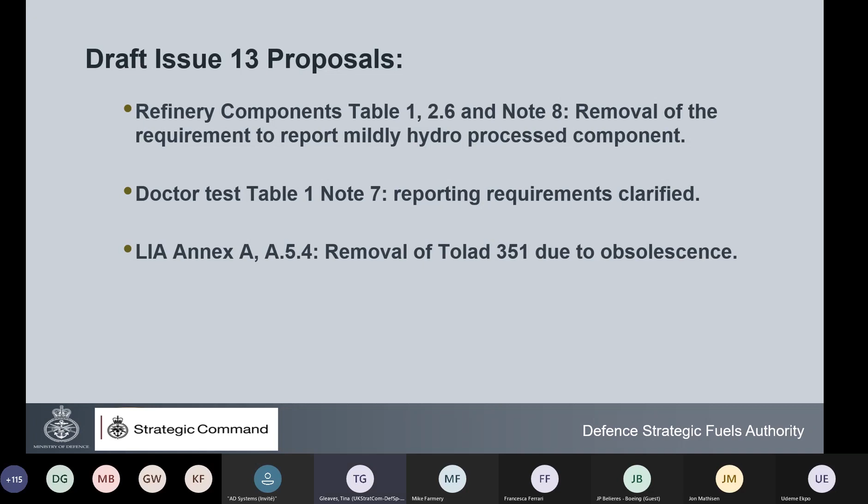Lubricity improving additive, Annex A, A5.4. So Tolad, so we've removed Tolad 351 due to obsolescence. This item is no longer supported by the manufacturer. Can you go to the next slide, please, Francesca?

The co-processing data source, Annex B, B4.3.4 has been reworded essentially to align with ASTM. The estimated distillation data in Annex E, Note 2, calculation of IP 123, has been reworded to provide a more detailed direction in what's required. In addition to these, there's just been some minor formatting and editorial amendments. Next slide, please, Francesca. So that completes issue 13 draft.

So if we're looking ahead to draft issue 14, work is intended to commence on draft issue 14 start of October 2021. So if you have any comments or suggestions, please forward them to myself and Katie. We're happy to take them forward to EXCO. Next slide, please, Francesca.

It's very early days for draft issue 14, but it doesn't do any harm to think about any changes we would like to see for the next issue. So what we have on the books that have been carried forward is conductivity. Can this safely be reduced down to 25 pS/m? There is currently some work going on with some of the OEMs looking at conductivity. So this topic will be addressed following the outcome of the external work.

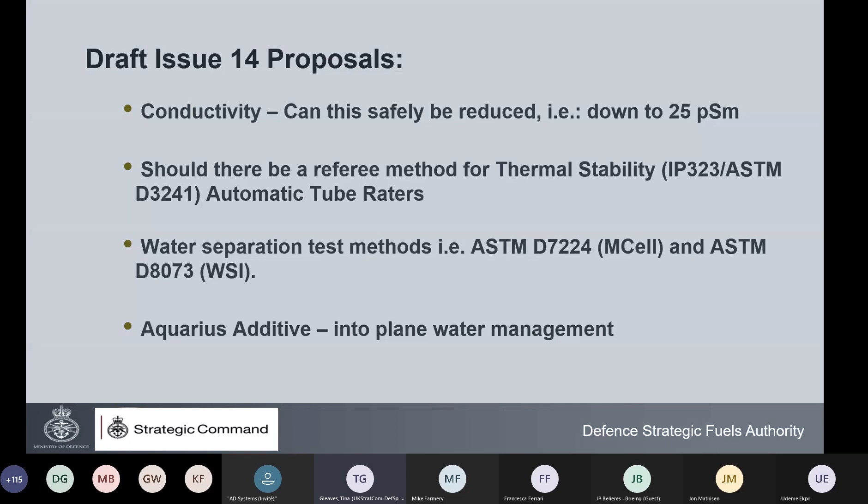It works by encapsulating water present in the fuel by forming a molecular cage or a micelle around the water molecules and is removed from the aircraft fuel tank by the combustion process. Next slide, please, Francesca. That concludes the draft issue 14, future issue.

The next AFC conference, hopefully, fingers crossed, we can have a face-to-face meeting next spring. The vaccination programs are rolling out and seem to be having a very positive effect on COVID statistics. So fingers crossed, we can do this. If that's the case, it'll be 15th to the 16th of March 2022. The venue will be London, to be confirmed. And details and registration will be published by the Energy Institute and DSTAN. Next slide, please, Francesca.

Right, all the images I've used in this presentation are from the Defence Image website, and they're from public sector information licensed under the Open Government License version 3.0. And this image shows the air-to-air refueling with Typhoon. And I have been lucky enough to have witnessed this in person quite a few years ago now, but certainly a memorable sight and an experience to remember. Next slide, please, Francesca.

Well, just before I take any questions, this image shows the Battle of Britain Memorial Flight, and this photo shows a Lancaster accompanied by Hurricanes and Spitfires. The Battle of Britain Memorial Flight mission is to maintain the priceless artifacts of our national heritage in an airworthy condition in order to commemorate those who have fallen in service to this country, to promote the modern day Air Force and to inspire future generations.

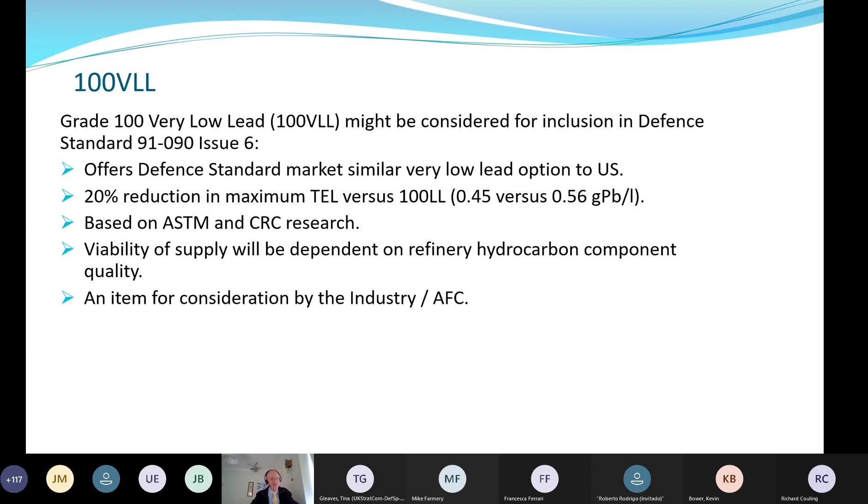If we move to the final slide, please. That completes the update for Defence Standard 91090, piston engine fuel. I hope you've enjoyed the presentation. Happy to take any questions.

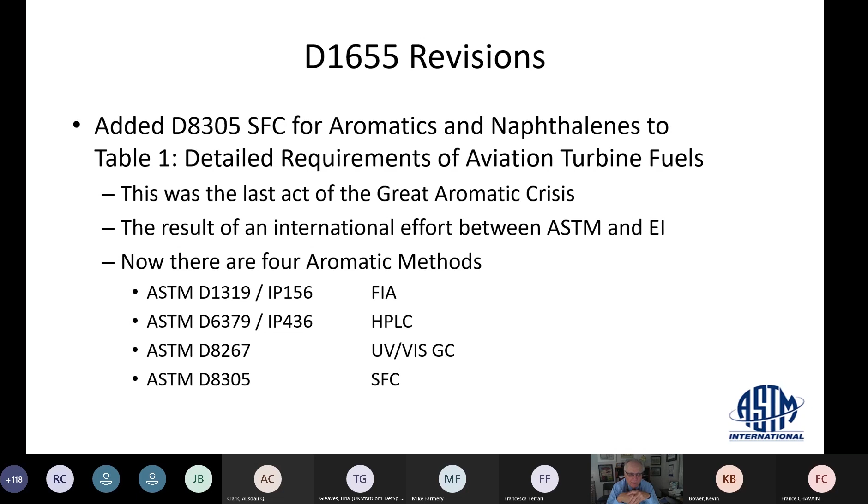Now there are 4 aromatics methods in the 1655: ASTM D1319, IP 156 FIA methods, which remain the referee in 1655; ASTM D6379, IP 436, the HPLC method; ASTM D8267, the UV-Vis GC method; and ASTM D8305, the supercritical fluid chromatography method. So next slide, please.

So George, just for information, the slide does switch over virtually when you say so. It may not pop up in yours straight away, but you don't have to wait. Okay. Thanks.

1655 revisions in process. We have a revision to the non-mandatory information for additives. Currently, the section discusses potential issues with process additives. The proposed revisions add cautions about recovery and crude oil transportation additives. We've seen, and I've worked with, issues that have been caused by recovery additives. One was an issue that caused corrosion issues that would make it fail the corrosion test.

Revision wording, co-processing of Annex A1. Sorry, we're working on it again, so you'll have to revise yours again. I'm sorry, but the pedants in the world want it very, very precise, and that's just the way it is. So we're looking to add ASTM D7094 flashpoint test.

We have a pending revision for the non-mandatory information related to derived cetane number to lean blowout issues. The National Jet Fuel Combustion Program has shown that when the cetane number gets low, the lean blowout becomes much more of a potential. And when you're dealing with synthetic fuels, that becomes more of an issue than refined fuels, because refined fuels typically come in 35 to 50 max, but some of the synthetic fuels can go well below that, so that's going to be an issue.

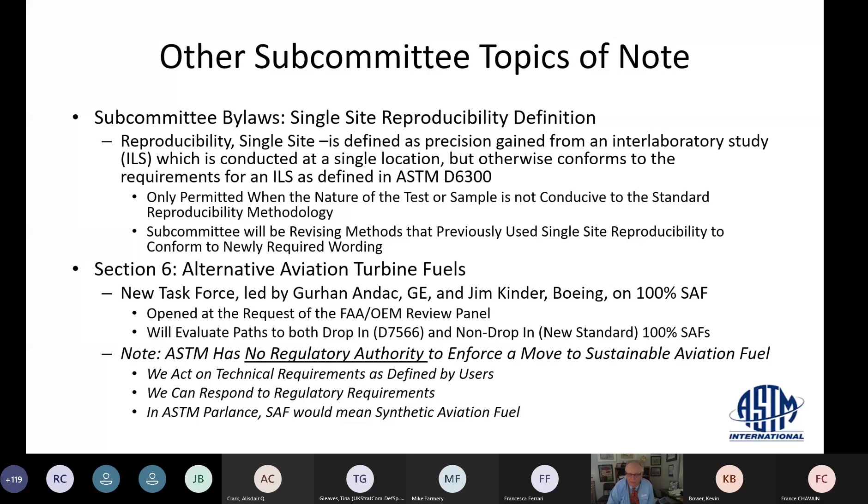I want to note that ASTM has no regulatory authority to enforce a move to sustainable aviation fuel. We act on technical requirements defined by users. We can respond to regulatory requirements, but in ASTM parlance, SAF would mean synthetic aviation fuel. And it's important because there'll be places in the world that may have the new drop-in synthetic fuel, but they won't be going to sustainable. But you want to be able to fly your planes there and get the same high quality fuel. Next slide, please.

The ASTM D02 and D02J meetings, all the ASTM meetings this summer, will be online via WebEx. The Aviation Fuel Subcommittee meetings will be between 10th of June and 22 June 2021. The daily schedule will be similar to the last two meetings. The final schedule will be provided to subcommittee members, and ASTM will send daily notices to Sub-J members. ASTM membership is not required to attend the meetings. Registration is required, and Vicki James has agreed to handle any assistance that anybody in the UK or Europe needs. Hopefully we'll be able to meet in person in Anaheim. So that's my presentation. Thank you.

George, thank you very much. Really good. I'm looking to see if anyone's got any questions. There's a lot going on, and interesting comments about looking at the 100% SAF spec. When you look at how much SAF there is, clearly that's an interesting play. Well, it is. We're making pathways and making it possible, but it's going to take regulatory effort to bring it to the fore. Our interest is making sure airplanes fly, and unlike other transportation fuels, where if your lorry stops in the middle of nowhere, you're just on foot, we can't afford to have failures in aviation fuel.

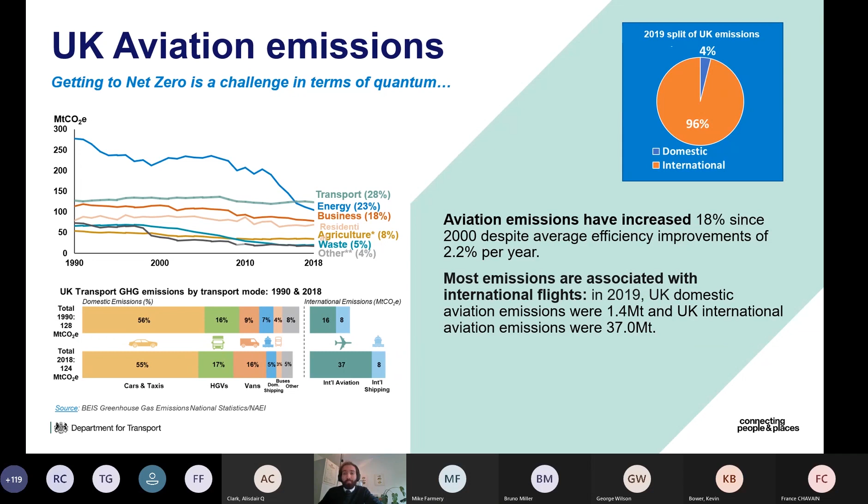Very briefly to set the scene, transport, as many of you know, is the largest emitting sector in the UK. Aviation today accounts for a relatively small proportion of these emissions, but emissions over the past years have been increasing significantly, in particular on the international side, with emissions actually doubling from 1990 to 2019. So as we look to decarbonize the other modes of transport, roads in particular, which are probably a bit easier to decarbonize, the proportional contribution of aviation emissions is likely going to increase significantly. And this is why it is really important that we act quickly to put aviation on a more sustainable pathway. So moving to the next slide.

Indeed, it is really important that we move towards a more sustainable pathway for aviation, not least because of the reduction in carbon emissions that can bring about, but also because of the significant environmental benefits, as well as the innovation and industrial opportunities that moving to a more sustainable aviation sector could bring. We shouldn't also forget the implications of COVID-19 and what that has meant for the aviation sector more in general, and why we continue to support industry throughout the pandemic. It is really important that we try to build back greener and better, and we use COVID as an opportunity to build back a stronger and greener industry.

So what does the UK government approach currently entail? It's a combination of different levers and different policies we're trying to put in place. Given the global nature of the aviation environment, we continue to work internationally through ICAO to implement CORSIA. We're working to implement the UK emission trading system, which recently came into force. More in general, with COP26 coming up in November in Glasgow, we're really keen to capitalize on the opportunities and galvanize domestic and international action to decarbonize aviation. And in the upcoming months, we'll be looking to introduce some new initiatives which go in this direction.

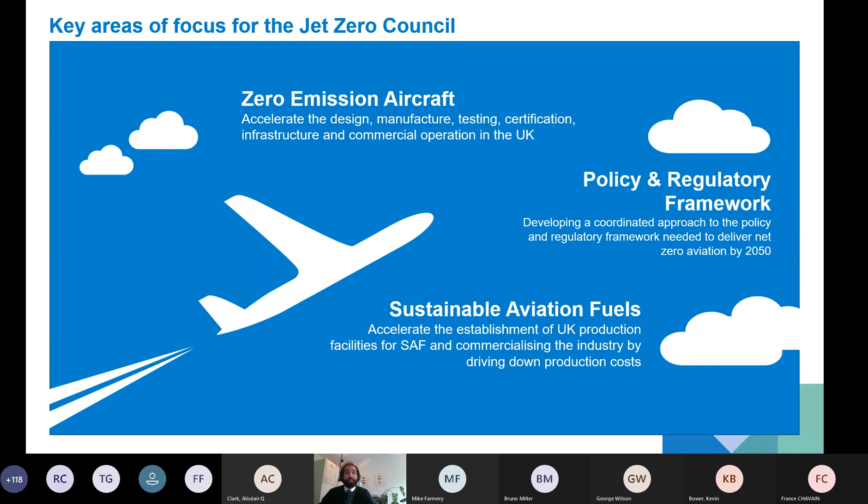So focusing on these key priorities for the Jet Zero Council, we established underneath the main forum some delivery groups, which will focus on a more narrow area of work. One in particular is sustainable aviation fuels, and the other one is zero emission aircraft. Starting from zero emission aircraft, that will focus on how we can work to deliver new innovation to the market, building on the existing work that the ATI Aerospace Technology Institute and the FlyZero initiative are already doing. And on the other side, sustainable aviation fuels, again, trying to establish UK production facilities.

Underneath the sustainable aviation fuels SAF delivery group, we focus on 4 subgroups. One of which focuses on the mandate, one on technology, one on commercialization, and one on COP26. Starting from the mandate, that will aim to support DfT in the development of a trajectory for sustainable aviation fuels uptake in the country. The technology work group will look at the sustainability criteria and how we can foster technology development in sustainable aviation fuels, what kind of innovation is needed, what's the potential of different technologies.

The commercialization work stream focuses a bit more on the industrial opportunities and trying to understand how we can tackle market barriers and how we can build plants in the UK. And the COP26 work stream is focusing on trying to gauge the feasibility of supplying SAF for the event in Glasgow later this year. Next slide, please. So this is linked up to this work. We're trying to gather evidence through the Jet Zero Council SAF delivery group to try to shape the wider policy package and our work on sustainable aviation fuel.

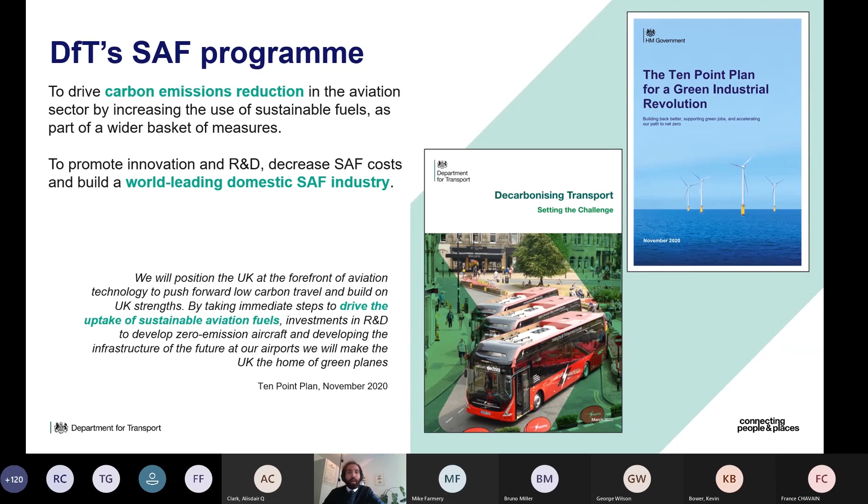And since then, we worked a lot to try to put some policy in place. We're building a strong team, and these commitments converge in the 10-point plan for a green industrial revolution, which many of you may have seen, released back in November by the Prime Minister, which includes some commitments on sustainable aviation fuels policy and funding as well. And I'll try to unpack a bit further these 2 pillars of our SAF vision now. So moving to the next slide, please.

Driving carbon emissions reductions, as said, is one of the key priorities of our work. I'm sure many of you are already familiar and probably more expert than me in life cycle assessment and understanding the potential that sustainable aviation fuels actually have in decarbonizing aviation and the life cycle emissions that they can achieve.

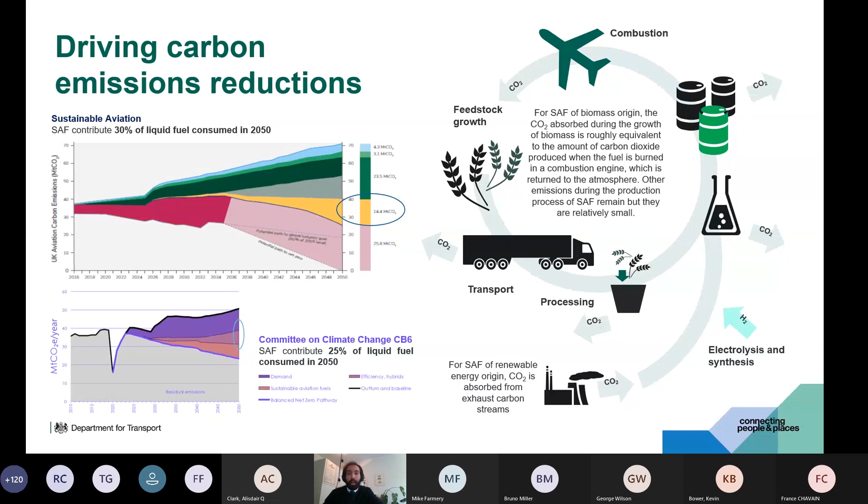But overall, there seems to be strong agreement within the industry that SAF will play a key role in decarbonizing aviation. And much of the work we will be doing at DFT will try to capitalize on this ambition and this expectation to understand a bit more what a feasible supply and feasible uptake of SAF in the UK could look like.

Moving to the next slide. I mentioned before building a strong SAF industry. This is again one of the priorities of our work. Ministers are really keen to build new plants in the UK and create thousands of jobs in the country, and we're already seeing quite a few projects active, supported by some of our previous funding: Velocys and LanzaTech, two companies aiming to build plants in the UK, which are eligible for funding under our Future Fuels for Flight and Freight competition, which opened in 2018. Fulcrum is one of the latest projects that announced a plant, I think, back in February in the UK.

There are indeed different potential opportunities for SAF players and many other companies which are looking to invest in the country. And again, we're really keen to ensure this is possible and feasible. Where could SAF plants be located? This is a good question, and we're working with industry to understand where SAF plants make sense depending on local supply chains, availability of feedstocks, and some of these considerations.

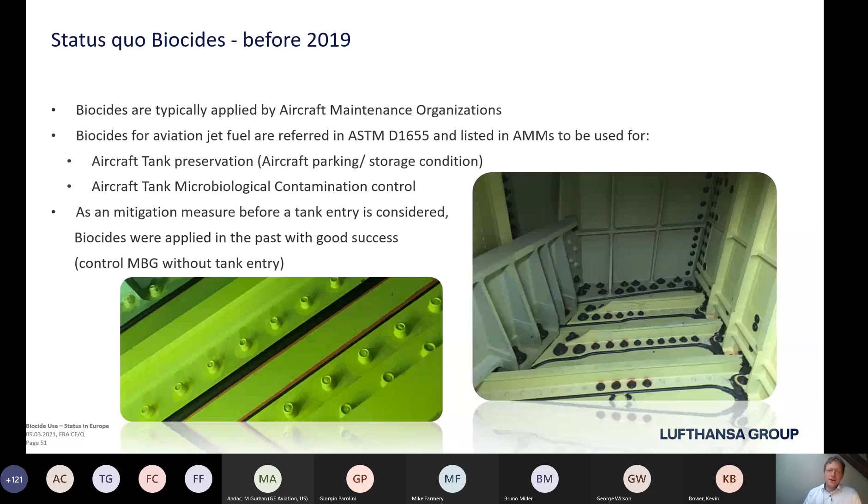On the next slide, we see a little bit of an overview of the market situation and also compliance-wise. We of course had these 2 biocides here, BioBor-JF and Kathon FP1.5, listed in ASTM Table 2, where we can find the additives for aviation fuels. Of course, these two were allowed and also referenced in the list of consumable materials from the engine OEMs and also from the AMMs. Unfortunately, in Europe, there is a European biocide regulation in place, which allowed only the one product, Kathon FP1.5, to be introduced in the market and used by the airlines or maintenance organizations.

So for our airline group, I can say that the biocide Kathon worked in real conditions pretty well. We had no adverse effects, but I think it's very important to say that whenever it comes to biocides, the proper application is key. It's not only health-wise a very problematic product. You need to make sure that it's properly applied with the correct dosage rate and proper mixing. But we come to this later on once again.

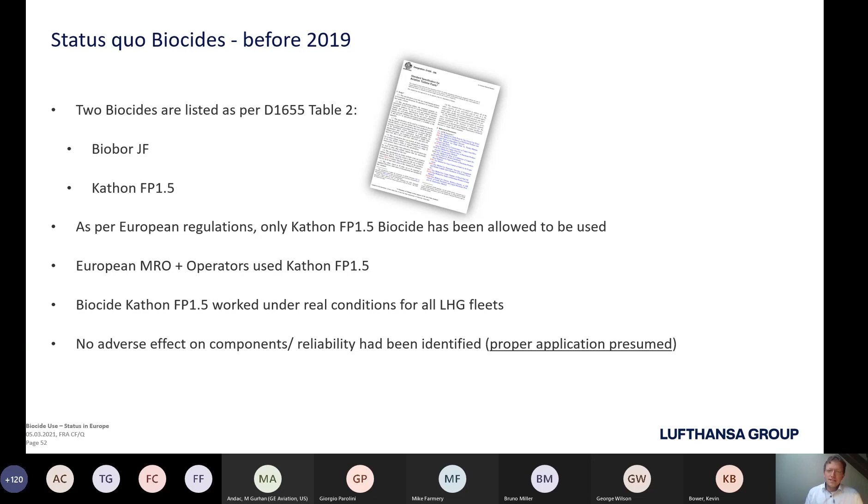And unfortunately, we're talking about several hours of ground time, not for the application as such, but most prominently for the soak time. The good thing is that the aircraft can go back into service without massive ground time, which would be necessary with a tank entry, when we effectively have to open up and vent a certain tank, and also the working hours.

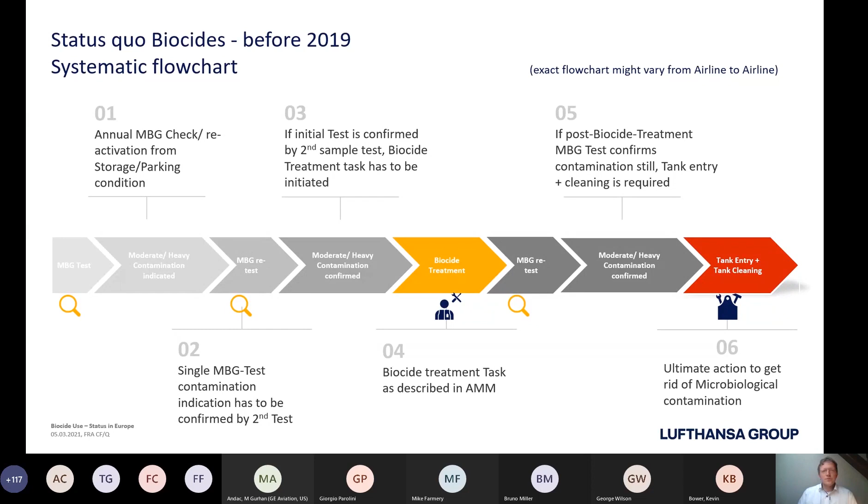And just to let you know, this general procedure may vary from airline to airline. There are several who allow a second biocide treatment in a row, but just to let you know what we are talking about when we're talking about biocide application, and where this fits in the maintenance schedule. So just as an overview, and on the next page we can go forward with the next agenda item. Next page, please.

Yeah, the developments in 2019, 2020 revealed on the next page several factors and technical findings, effectively safety issues. On the next page, please. We had in 2019 cases of biocide-caused incidents, which were documented, and these caused, at the end of the day, engine OEMs to remove the biocide Kathon from their list of approved additives. To make things a bit complicated, this decision has been made only by some of the engine OEMs, and some still allow the usage of Kathon.

But on the other hand, more or less directly after this decision from this certain engine OEM to remove this product, the manufacturer stopped production and also refused to bring the product back into the market. So we had an accessibility issue, especially in the EU, where we had no formal allowance to use Biobor JF, but very high demand caused by the pandemic and the massive aircraft groundings.

So good thing is there was a solution for this, but there were several effects where we had to adopt our procedures and make sure that no insufficient biocide handling took place. And I come to this in the next 2 slides. We can go to the next agenda item already.

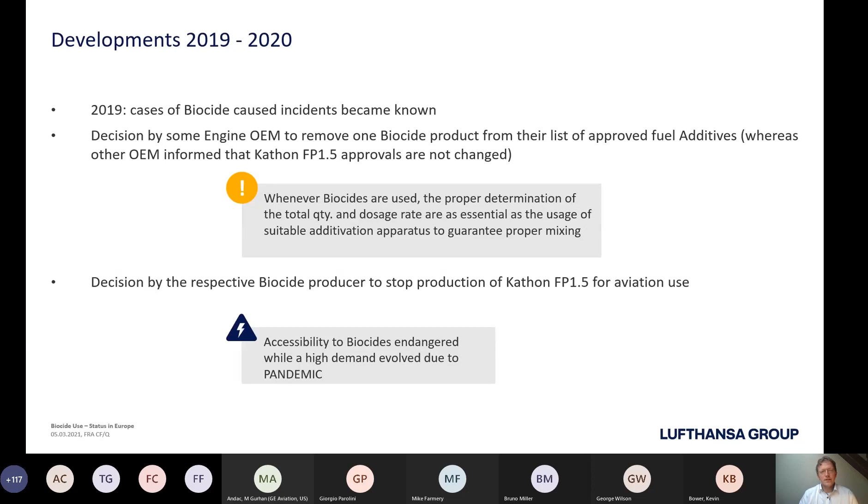Thank you. So we established a biocide task force underneath the IATA Technical Fuel Group, and fortunately we had various experts from the biocide manufacturers to the microbiologists, which provide the test kits, all the way to the OEM and also participating airlines, to share the most prominent issues, lessons learned, and also share the information and make sure where the limiting factors are sitting and where we need to intervene and adopt the procedures, adopt the handling guidelines, etc. On the next slide, we can see. Next slide, please. Thank you.

We can see that we had 3 major objectives. And of course, the most prominent one, we want to have proper aircraft storage, and we want to allow a safe restart and robust procedures for future operation, which is a bit tricky and difficult because it has been pretty clear before this removal of Kathon product in the EU. Usually the maintenance organization handled only 1 biocide, and if now 2 biocides are used, or also with a transition period, 2 biocides in the first place and afterwards another biocide, which needs to have other handling procedures to be followed, we need to adopt the additization carts, we need to adopt the procedures, etc., etc.

So various items, and this working group is ongoing, so there's still work in progress. But the good thing is we already indicated some procedure alignments between the different OEMs. We had some good steps forward with regards to the information sharing, and also the Brexit effectively did not really help, as the formal allowance of a new biocide, namely Biobor JF, in the European Union and the UK, needs to go in parallel.

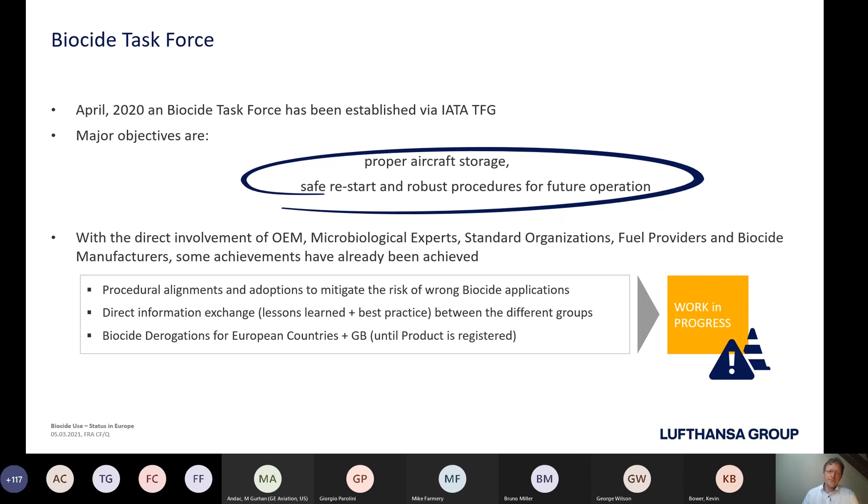On the next slide, we see for the maintenance organization, just as an example here from Lufthansa Technik information, a big step forward, of course, was the development of the new Energy Institute guidelines. So here we can see the 1566, which is the biocide instruction, or in general, it collects the design criteria and the handling instruction for proper biocide additization carts. And this one will be referenced in the different AMMs in the future.

And we need to make sure that the maintenance organizations will be aligned with this standard, where we have a bit of paradigm change, because the maintenance organizations usually are not as used to handle Energy Institute information. So there's a little bit of work to be done, and also, as I already said, covering the different handling instructions via dedicated information to the mechanics, and really make sure that the differences are clear to everybody, and to prevent any mixing or interchanging from one biocide to the other, which is very problematic.

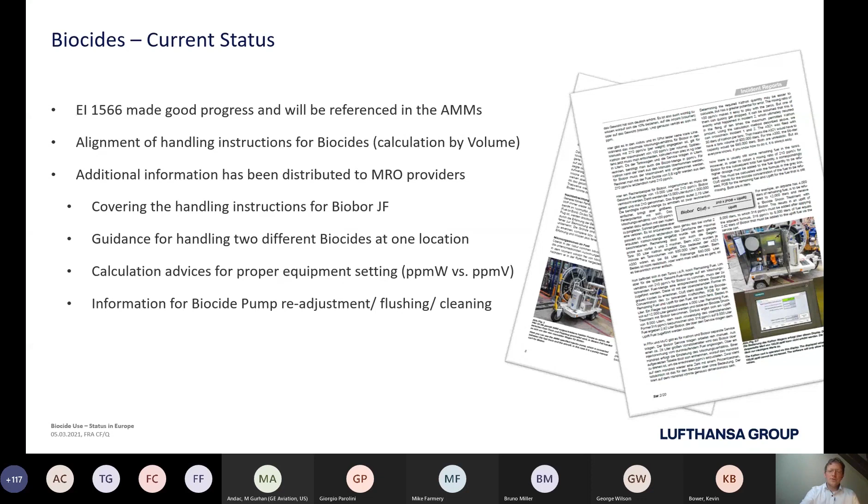On the next page, I quickly summarized the procedure of approving the Biobor derogation, and also renewing this derogation. Unfortunately, there's a procedure to have a biocide formally allowed to be introduced to the market, and this is the derogation following Article 55 of the European biocide regulation. Unfortunately, this one is time limited, so the airlines and the maintenance organizations, they have to renew and better to start their stopwatches.

Make sure that you have accessibility to this important maintenance tool, because unfortunately it's not possible to have a general derogation from top down, from the European level down, to be effective on all the individual countries. You need to go individual country by country, and the competent authority will decide for the first derogation, which lasts maximum 180 days, and afterwards we need to go for the second approval, which has to be approved by the European Commission for a period of 550 days. And this one has to be repetitively renewed until the full approval is reached.

And unfortunately, we are talking here not about a few years. In the worst case, it might be a decade until the full approval is made. But I hope, as things stand, we have a well-known product. We have very good support from the manufacturer, and I hope that we can go by the mid-2020s, so 2024, 2025, for full approval of BioBor JF. And also, of course, within the working group, we are discussing any alternative solution for BioBor, just to allow a second additive, second biocide fit for purpose, to be introduced into the market.

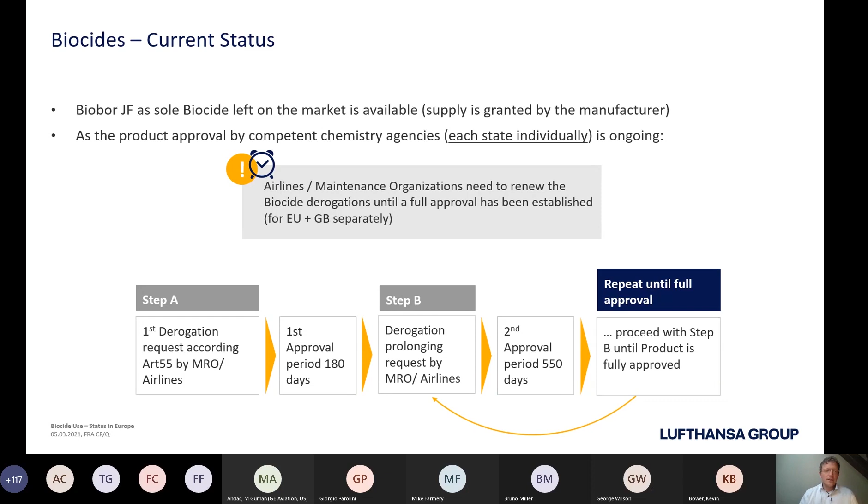At the end of the day, I already mentioned it. I'm very, very happy that we have very good support by the different stakeholders, and it's very much appreciated, not only for Lufthansa Group, but as well for the other airlines. I think we did pretty good steps forward, and at the end of the day, we're talking about a safety issue: prevent the microbiological contamination on the one hand, on the other hand, of course, prevent any safety issue evolving from the biocide application as such. So these are two very important things, and I'm very grateful for the work done in the working group so far, and also bilateral between the Lufthansa Group and the different stakeholders.

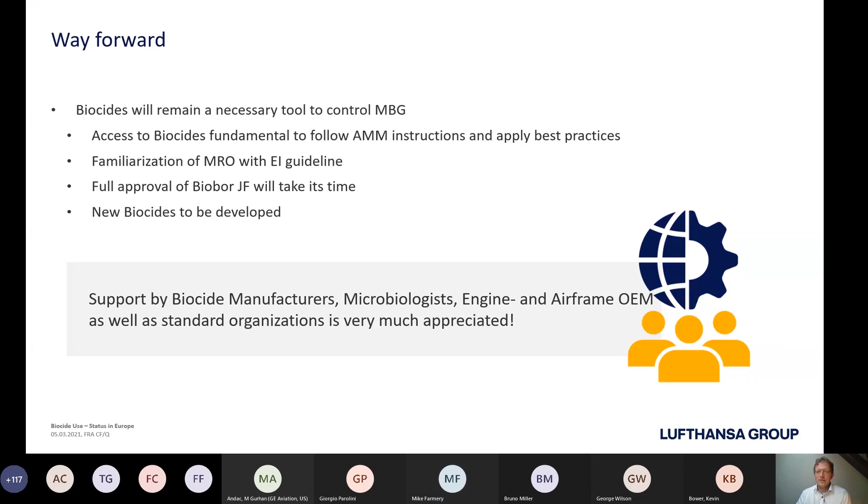Yeah, thank you very much, Andreas. That's a great, very comprehensive and fascinating story. It makes us realize just how complicated even relatively straightforward things can get. Whether it's trying to measure aromatics in jet fuel or sort out a suitable biocide, there is complexity in all the aspects of aviation because of the extra demands for safety at all times. But it's a great story, and it's good that it's got, as it were, a happy conclusion to it and a workaround.